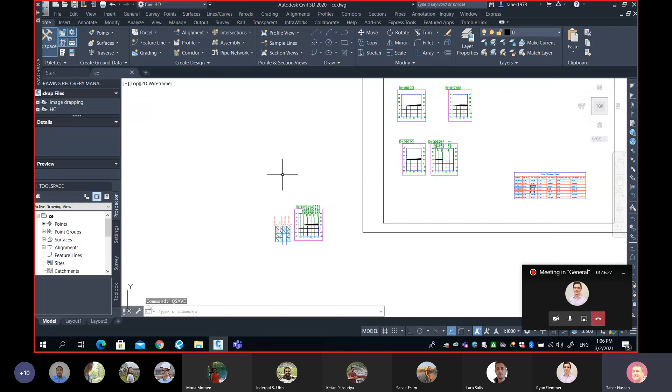Okay, so I still have 50 minutes in my class or so, 45 minutes, and I have something to teach you today. It's Civil 3D. So please go to your D2L, because I want you to download a file from D2L.

So go to your D2L like I'm doing right now. Log in, go to your surveying course, then go to content, and then under module number 3 we have a new module which is very short. It will start now and finish in 40 minutes. Very short module, and it's basically a Civil 3D training.

It's called Curve Computation and Layout. I want all of you guys to download those two files: the tutorial itself, which is a PDF file that contains all the discussion we will have in the next 40 minutes, plus a file called HC, which is a drawing file. Please download both, and also open the HC file in your AutoCAD or Civil 3D.

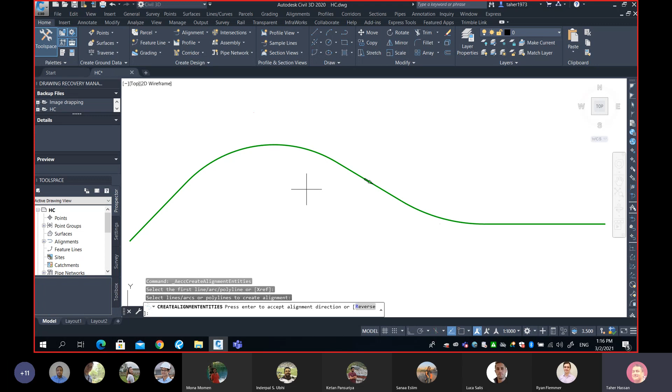If you like it, great, hit enter. If you want to reverse it by starting your alignment on the east side and ending at the west, then you can just type in R for reverse and hit enter. You know what, I'm happy, I'm going to hit OK. Then you can see we end up with this window.

We've done it before, it is called here my alignment. I can, for example, call this one Sarcee Trail. Typically we call alignment with the name of the road or our design, Crowchild Extension, Sarcee Trail, whatever. So here is the name of my alignment.

Next is alignment. Excuse me. Anybody's trying to say something? No, sorry, I forgot to mute myself.

No worries. So next we have type of alignments like center line alignment and other alignment. In this exercise it doesn't matter, I'm going to choose center line alignment. There are some other optional settings, like for example site. So we have no site here, so I'm going to leave it at none.

The style, which controls the color of the alignment and if it's continuous or dashed, I will leave as proposed. It doesn't matter, there are some few existing styles, but again for this exercise I will choose any one. It doesn't matter. I want to show you some labels, so you can see here I'm adding some labels. You can add all of them, or you can even add major and minor. It doesn't really affect my exercise.

And finally here the software allows you to add some curves if you want. My curves are there already, so I'm going to deactivate this option. I will simply erase my existing entity, which means if I hit OK, this green line will go away, will be deleted. So a name, everything here is optional, and then erase and hit OK.

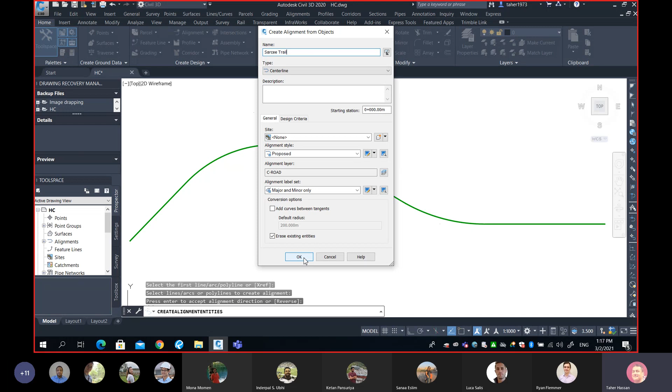What happened here is that the software right now has turned my green polyline into an alignment. So this is an alignment. And you can see the alignment comes with lots of labels. Those are called stationing. And it's kind of messy, messy because it's too much. The frequency of the stationing is so high.

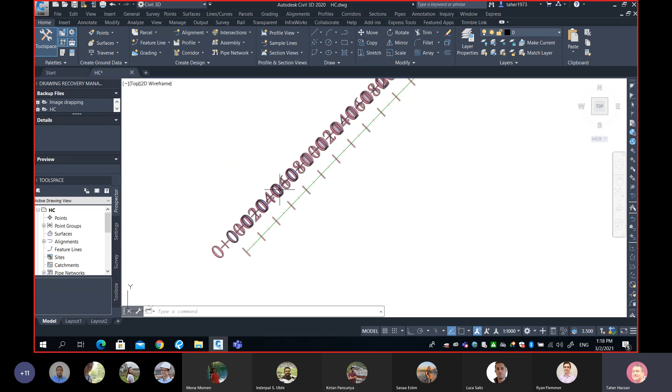I'm going to do something not really for the exercise. I can finish my exercise right now, but I want to make it clear for you. So I will simply change the frequency of my stationing. I'll show you how. And again, that's optional. I will click here on the labels themselves, then I'll right click, then I will go to edit alignment labels.

I'm trying to reduce the frequency. There is so much text on my plan view. So if you click on the labels and then right click and go to edit alignment labels, then I think almost all of you guys will figure out how to change the frequency of my stationing. Any help? Which number should I change?

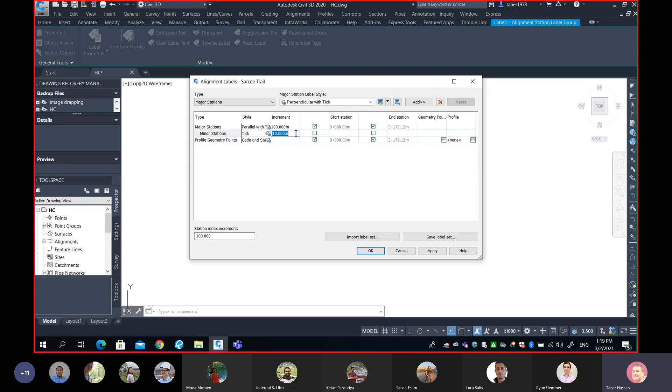The increment. Increment. So I will go here. I will edit this number. I will make it 100. It means add a major station at 100. And this one, I will make it 50. Then we'll hit OK. And see what happens when I hit OK. Now things become very clear.

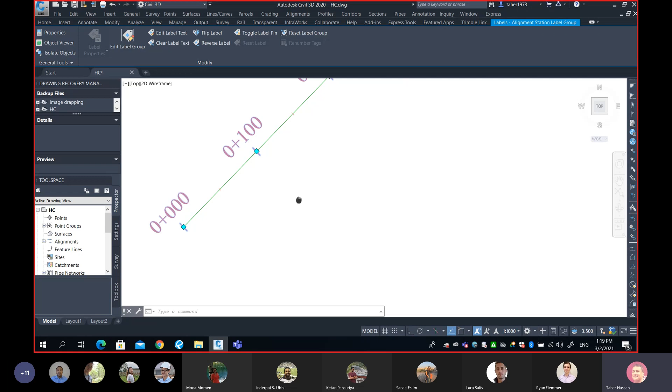I have a major station, which is a tick plus a station every 100 meters. And every 50 meters, I have a small tick, which is a minor station. Those are like major and minor contour lines. Those are major station and minor station. Now I'm ready to start building and creating some layout data.

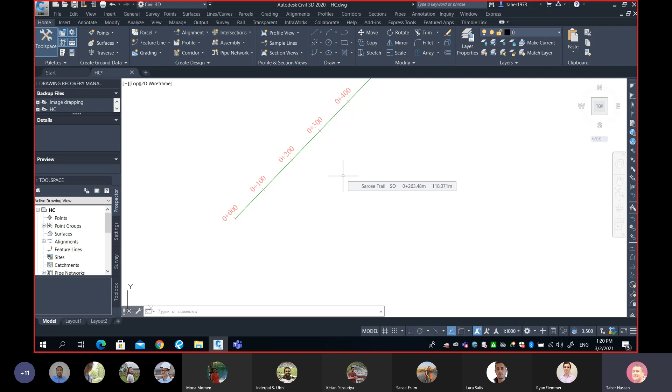Now, one of the methods that we typically use, which is very easy, is if we're able to create a Civil 3D point on the center line of my road, then I can export these points to my surveyor. My surveyor can take the file and simply upload it to the data collector and start laying out these points. Okay, so that's option number one, but that's not the best option. I will show you one more option later on. Let's create some points on the center line.

So what we do is you go to the menu points, and you guys remember we've used this window or this menu here a couple of times. One time when we imported points and one time when we added tables. Today you will have more on the same window or menu. So we go here to create points dash alignments.

And you can see we have so many ways of creating a point in Civil 3D. One of them is with respect to an alignment. So create points dash alignments. Even under dash alignment, there are probably more than 6 options. I will cover maybe one or two of them. Station offset, this one here, you need to enter the station of the point and the offset of the point, and it will create one point at a time.

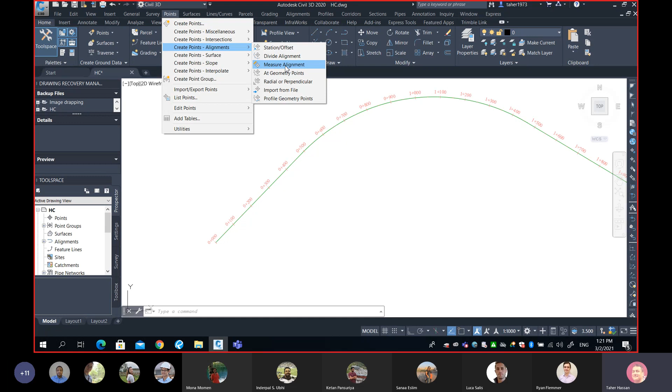It's not really handy, because if I want to create points every 25 meters for a 10-kilometer road, you know what happens? You're going to spend a couple of days to do that. Okay, so the other option here, which is faster, is an option called measure alignment. This measure alignment will simply do the magic, will simply place a point for you at every constant interval. Let's click on measure alignment.

So you can see here I'm ready to add my points. The software is asking you to select the alignment. So all you have to do is zoom in, click on your alignment, and the software picks the alignment and asks you a few questions. Number one is, what do you want for the starting station? Do you want to start from the start, from 0? If you agree, then hit enter. If you want to start from a different station, for example 1 kilometer, then you type in 1000. I will start from the beginning, so I will accept it as 0.

The second question is, do you want to go all the way to the end of the alignment, which is 3179.12? Yes, I want to go all the way to the end. I want to create points for the entire alignment. Hit enter. Next is specify the offset, which is how far left or right of the alignment. If you want to create points on the center line, leave this number as 0, so all your points will come to the center line.

If you want to create points off the center line, not on the center line, then type a number. This number can be positive or can be negative. If you place a positive number, the points will go into the right side of the alignment. And if you add a negative number in the offset, then the points will go left of the alignment.

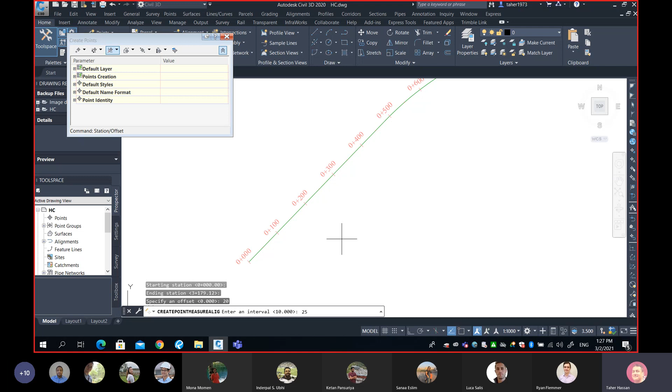Remember, ultimately, I'd need to place a point every millimeter to make my road perfect. But the thing is, you have to be practical, because adding a point every millimeter, the surveyor will take forever and it will cost you a fortune. So we go here with 25 meters and see what happens. Do you see what happens when I hit 25 meters? Something new has happened.

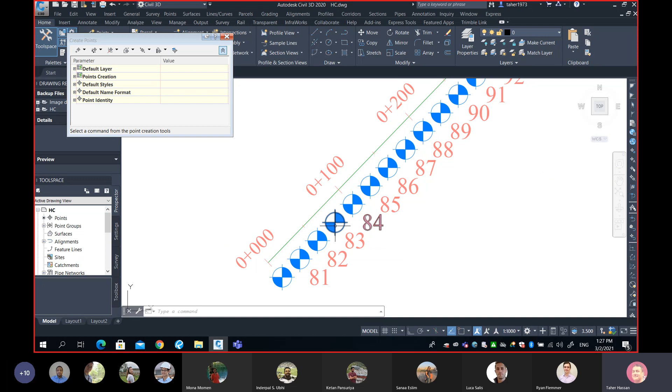You can see here, we have these points. If I zoom in, all these points starting from point 81 every 25 meter. And you can see they are not on the center line. They are offset by how much? By 20 meter. And the distance in between is 25 meter. So from point 81 all the way to the end of the alignment, we have a point here, which is 208. So the last number is 208. Remember this, 81 to 208.

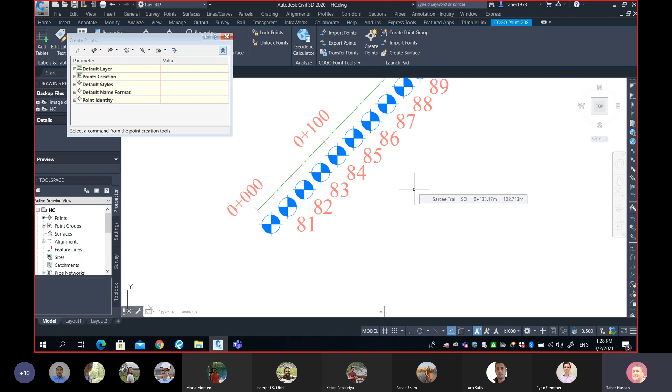Now, let me ask you a question. What should I do right now? I have created my points. I have Civil 3D points on my alignment. Should I save my file and send my CAD file to my surveyor? What do you think? Should I save my file as AutoCAD and send it to them and say, okay, you guys do it? Do you think this is a good format to send them a CAD file, or I need to do something to send it to them? Any thoughts? What should I do?

Go ahead. I think maybe we need to add something like elevation. You know what? Typically for layout of roads, we just go first by XY. So we place a point XY on site to tell us where the road is going. Then we control the elevation in a different step. So we keep adding layers until we go to the right elevation. So in layout, we typically do only 2D, and then the elevation will be monitored during the construction. So we need only XY.

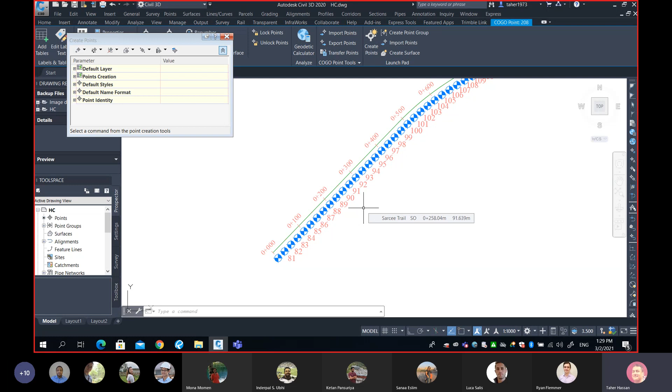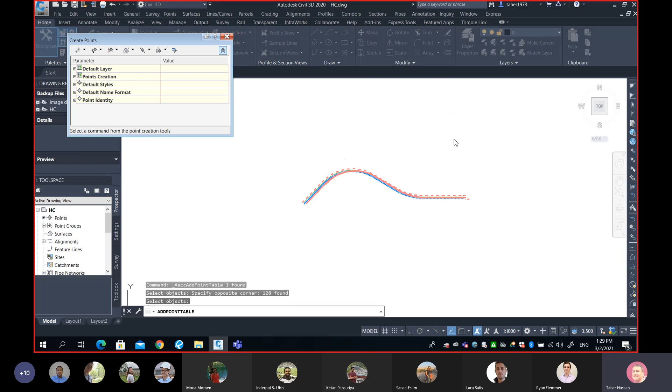But I'm asking you about the format. Is the drawing file a good format for my surveyor, or should I do something to give them a good format? Northing, easting points. Thank you so much. Okay, so some of my students in the last class said, Taher, why don't you print a table? For example, go to table and then add table and then say, okay, here is my points. Select all these points and then create a table for them. So for example, here is my table.

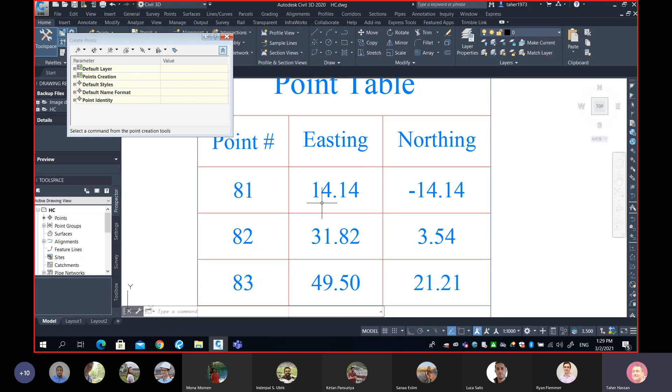And then your surveyor will go here and is trying to lay out point 81. So the surveyor will have to manually input the coordinates easting and northing of point 81. Do you think this is a good idea, to give them a drawing table? Or should I be smart and give them a better format? We should create the point file that we insert. Exactly, sir. So it's kind of opposite of what we've done before.

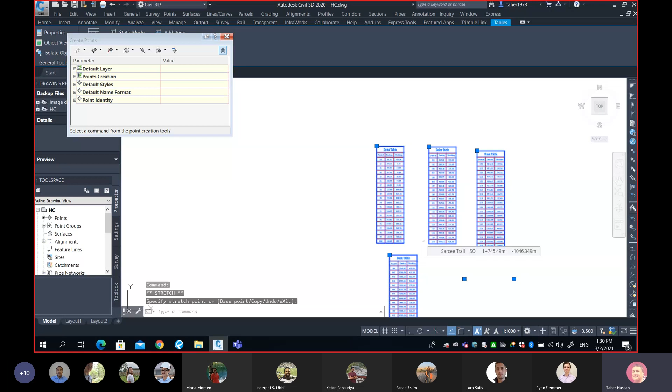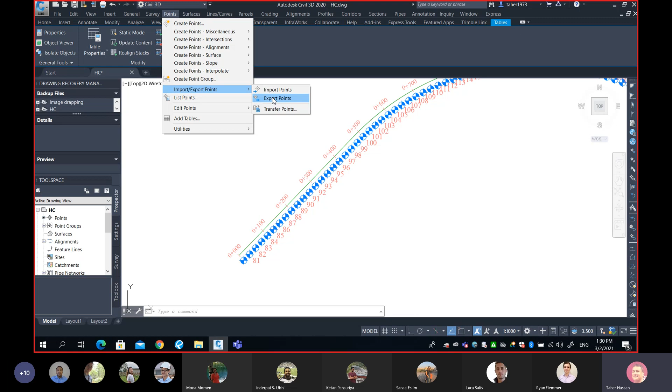Remember, my surveyor gave me a text file that contains our data in a text format. We will do here the same thing. We will try to write for my surveyor a text file that contains the easting and the northing of these points. So it's kind of opposite. Look at this. If you go point, you go import/export. If I have surveying data and want to bring it in, I go import. If I have points in my drawing and I want to write a text file that contains coordinates, I go export. So it's the opposite, import and export. So I will try to do that.

I'll go export. And look at the export point here. So first, you need to find the format. If you drop this menu, you will find the same formats that we did for the import. So we can write our file as PENZD or PENZ. There are so many formats. I'm going to leave this one as PENZD. Next, you want to say, what is the file name? Remember, you are creating a new file that contains these coordinates. So you click here and start writing your file. Watch me. I'm going to say Sarcee Trail.

If we don't have elevations, why do we pick that format style? You will see that it will simply add a default value. So the surveyor will look at the default value and will know that's off and that's not the right elevation. And again, it's up to you. If you want to export it as PEN without Z, without description, you can also do that by simply clicking on the right format from the drop-down menu. So I'm trying here to call my file a good name, and take my advice.

When you work, you must have an organized way of naming your file. Don't just go file 1, file 2. This is really a bad idea. So I'm going to say here Sarcee Trail. I'm going to say here 20 meter right, 20R, and then I'm going to say at 25 meter, and that's my interval. And I will say open.

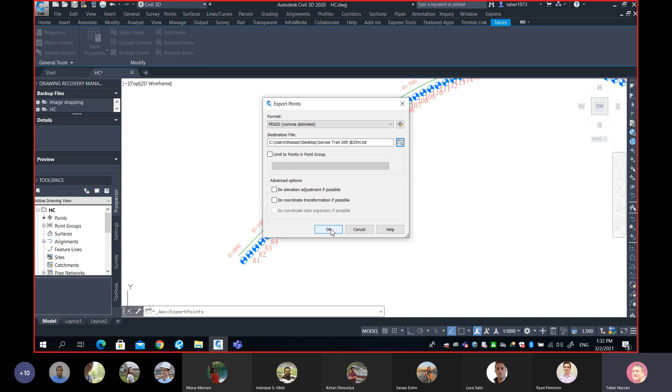And you can write your file in different formats like CSV, XYZ, AUF, NEZ, and all of them, to be honest, are text formats. So it doesn't really matter the extension. All of them are text files. Then I will hit OK, open, and finally hit OK. Then go to my desktop, and I will open my file and see what I have. Do you see that I have a default elevation?

Look at this number, -99999. Right away, all surveyors know that. Once you see -99999, you know that this is a wrong elevation, an outlier elevation. However, we use the easting and the northing. And again, if you don't like it, you can export only point number, easting, and northing.

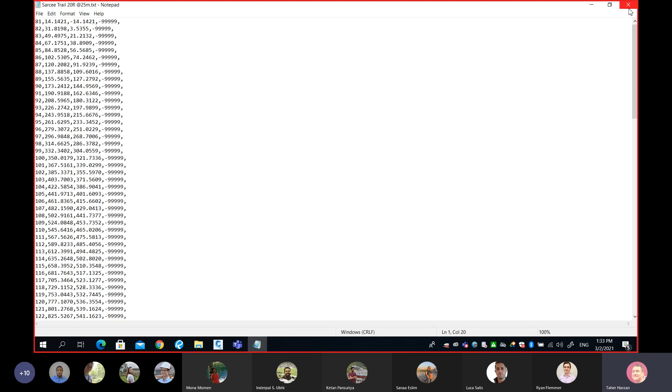Now, here is one thing you have to be careful about. I will show you something that's kind of annoying. Watch this. I'm going to show you my tool space. I'll just have to move things around, so please be patient. Now let me ask you, how many point groups do you see in my drawing? Can you count, please? 2. Can you give me the names?

ST and road. I'm asking you, those point groups, ST and road, are they empty or do they have points? They're empty, and we already discussed this. I said before, if you see a black dot here, it means these point groups have some points. So I have several 3D points, but those point groups are empty.

So where are these points then? Which point group do they belong to? Any help? All points. Exactly. By default, when I create new points, they go to underscore all points. And you can see all of the points are here. If I expand here, you can see all the points.

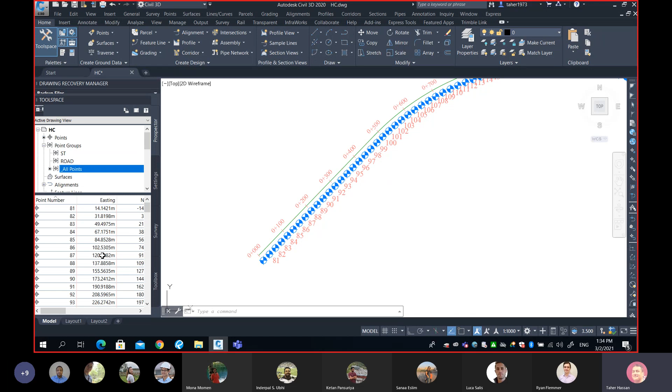Now, here is a problem. What if I have another road here, and I am doing the same thing, creating points along this line? Where will these points go? Into all points again. Is that a good idea? When we create points, by default they go to underscore all points. So now my all points will have a mix and match.

We'll have points on Sarcee Trail, and we'll have points on Crowchild. So all the points in my drawing go to the same container. Is that a good idea or bad idea? And remember, look at this. When I exported my points, I simply exported everything. So there is an option here, please look at it right now.

Right now, if I hit OK, it will simply export all the points in this drawing, which in general is a mix and match between points on Sarcee Trail and Crowchild and other roads in my drawing. However, I have the ability to limit the export to points in a point group. If I drop this menu, I have my 2 point groups.

However, if I click on road, give a name here and hit OK, what do you think is going to happen? Any thoughts? Remember, road is empty. Right now, the point group road is empty. That's why if you hit OK right now, your file will be empty. Do you guys agree? Yes.

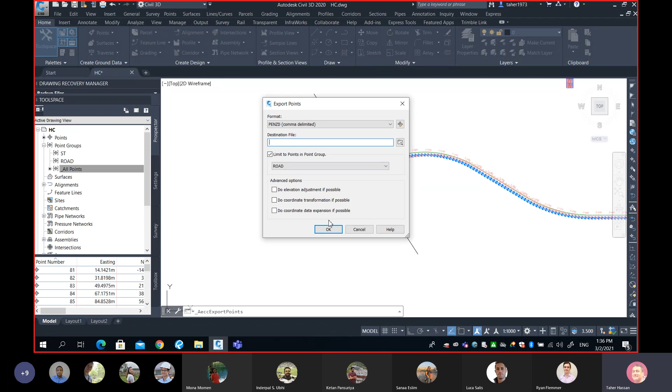So I'm going to show you a little trick. What it does, it simply takes a copy of these points and places them into road, which means inside road we would have only these points. Watch me, please. Right now, they are in underscore all points. I'm going to show you how to move these points and place them in road. Very simple. Watch this.

You click on road, right click on road, and then say properties. Did you guys see this window before? Can I get confirmation?

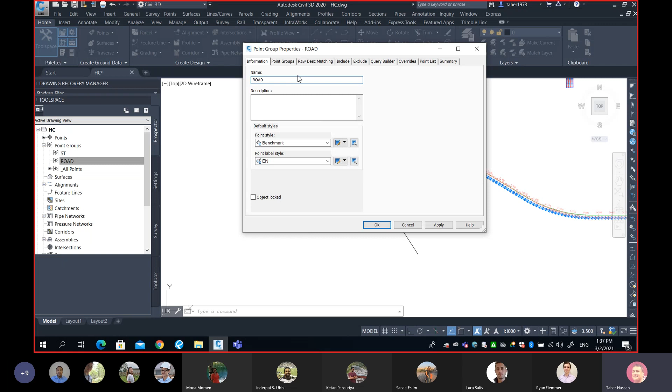Yes. Yeah, this is where we played early on. We changed the name, we changed point style, point label style. However, today we have another job to do. I will go to include. Watch this. I go to Include tab. When you go to Include tab, this area here allows you to include points to my point group using several options. For example, you can include points based on the description, or based on names, or based on elevation,

or based on point number. Anybody remembers what was the range of my points? Anybody who has good memory? What's the first number? 81 to 208. So 81, that's the start. And then I put here dash and I go to 208. Thank you so much. You guys are amazing. So my points, the first point was 81, the last point was 208. What does it mean right now? It means, hey, Civil 3D, include for me points with number from 81 to 208.

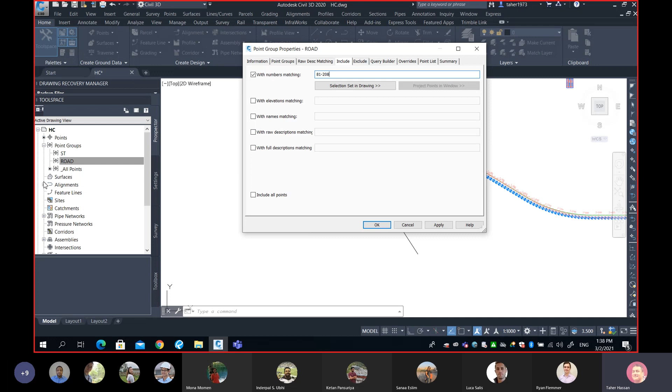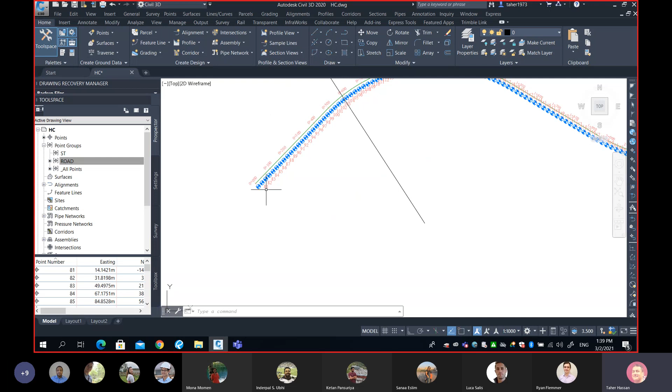Okay, I want everyone to look at my Toolspace as I hit OK. Everyone, please focus here, because something is going to happen. If I hit OK, do you see what happens? Anybody to confirm what happened after I include my points? It copied the points into Road. You can see here right now, Road is not empty anymore. Right now, Road has been populated by the points from 81 to 208.

Okay? Now, what I can do is I can go to Points, go to Import/Export, and then I can simply choose my file name, file format, and I can limit my export to the point group Road. In this case, your file will not be empty. The file will have all these points from 81 until 208.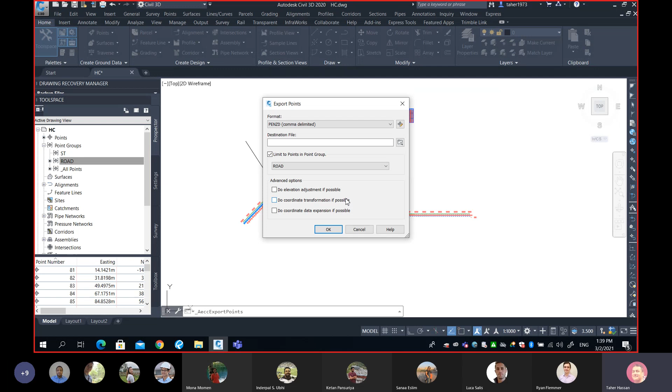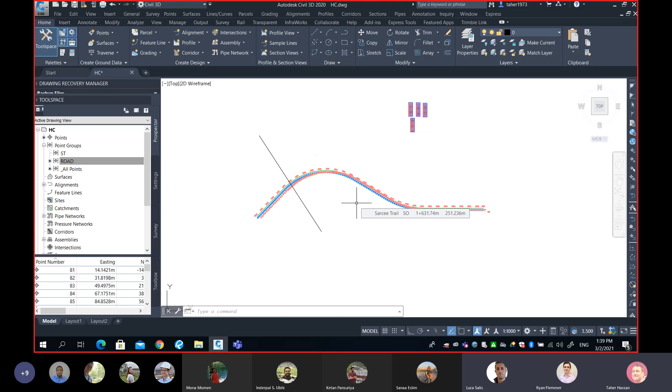Okay? And by the way, let's say I come here and I create points on this road. I will create a new point group, I will add these points to this point group, and when I export, I will limit my export to only this point group. Are you guys following? Yes. Okay, let's do one more exercise.

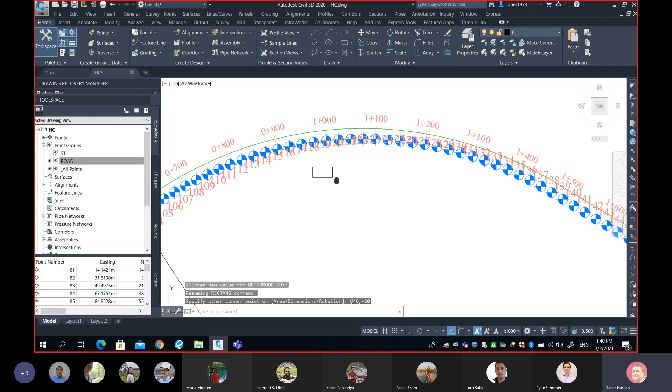Let's say another designer of the same project designed here a building next to my road, and this building was simply 40 meter by 20 meter. So this is my building. He gave me the design on this CAD file. And the building is supported on piles, and the piles, let's say, are at every 10 meter. Please be patient, I'm just doing some CAD work.

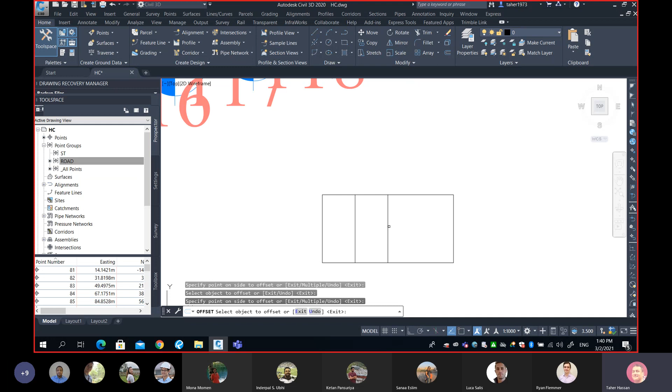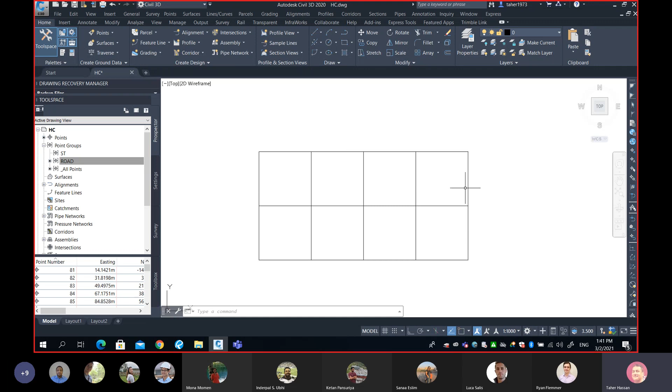I want to show you the location of the piles. My piles are simply here and there and there, and then finally there. So every intersection here gets a pile. And I want to lay out these piles. I want to get my rig and tell them, drive a pile here. So what I have to do is manually place points at these intersections. Then I will export these points.

Please watch me. This time I go from the Points menu, but my points right now are not with respect to an alignment or a surface. All I have to do is go to Create Points. You'll get this window here. If you drop this menu, you will get exactly the same options as we get from the menu. So we can do it manually, we can do by station offset, we can do by measure alignment. All these options are available here.

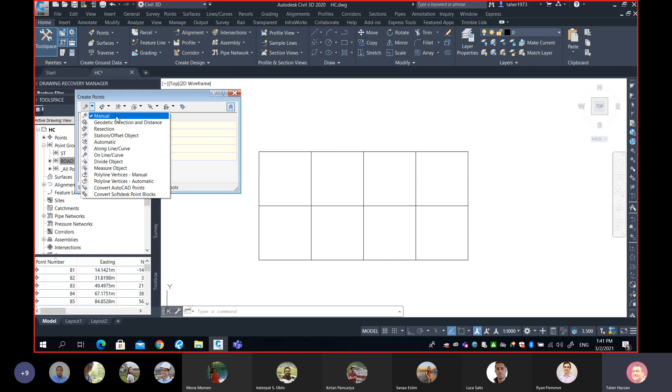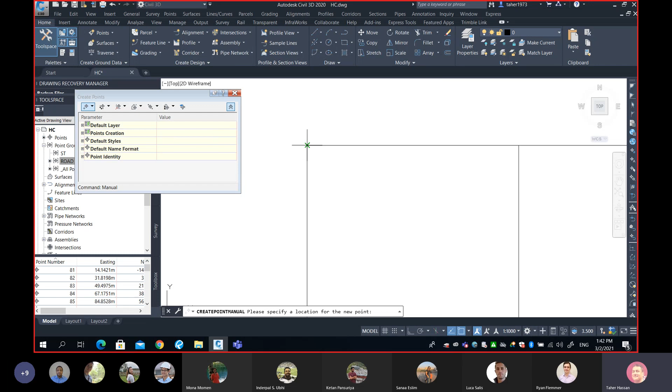So we go manual. Right now I'm ready to place my points. Before I do that, you should activate your OSNAP because I want to hit exactly the intersection. So I go here, make sure OSNAP is there, and hit OK. If I click here, my point will come to the intersection exactly. I will click here on this corner. So here is my first point, second, third. I'm creating right now the location of the piles. Okay.

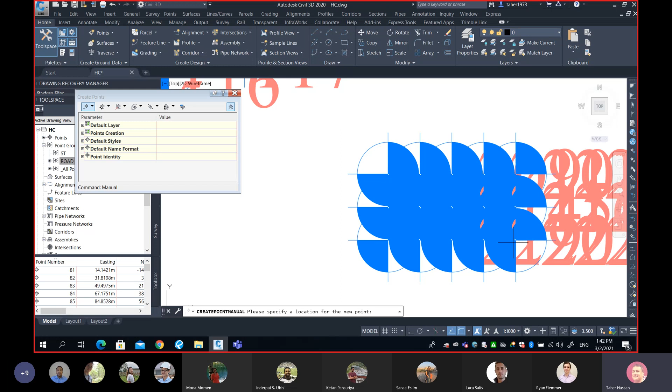And then number 6, 7, 8, 9, 10, 11, 12, 13, 14, 15. So again, this is messy because the font is big and the point is big, but I have created right now 15 points on the pile location.

Now I'm asking you right now, how can I get these points to my surveyor? Anybody give me some idea on how to export these points to my surveyor? If I export right now, is that a good idea or bad idea?

Only the people who follow the discussion will answer this question. If I export right now, you think this is a good idea or bad idea? Bad idea. Better to put it in a point group.

Exactly, it's a bad idea because when I export right now, the software will export all points, which is the piles plus all the points on the road. So this confuses my surveyor.

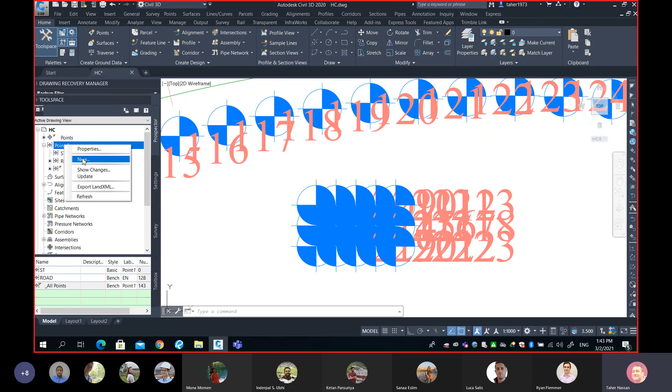To do that in a good way, you need to cancel. Then I come here and say, I want to create a new group. So you click your cursor on point groups, right click and say new - it means create for me a new point group. And here you call it, for example, building piles. So I'm trying to create a group for building piles.

Right away, once you create the point, you go to include and simply click on this option. Do you guys remember what was the number? Anybody remember the number of the point? I know some of you will say 209, because that's where we ended at 208 before. So my point here would be 209, and then you add 15 points.

By the way, you don't have to memorize those numbers, because here is another option: select set in drawing. So you can also select the points by selection. If you click here, this window will disappear and you can manually select all the points you like to include. Hit enter, please watch this.

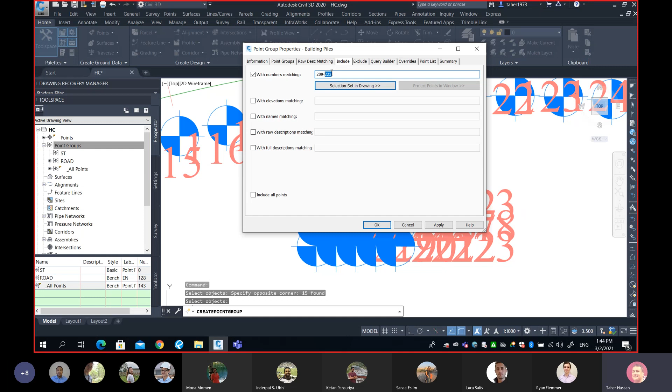So right now I get from 209 all the way to 223, which is 15 points. Let's go ahead and hit OK. You can see, look at my tool space - I have a new point group called building piles, and it has 15 points like those, because we have this dot.

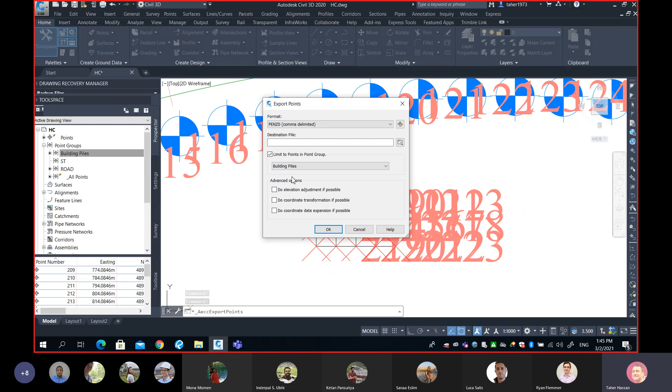Right now, I can go to points and export my points, and I can limit the export to my building piles. I give it a name here, for example, building piles, and then hit OK, and hit OK.

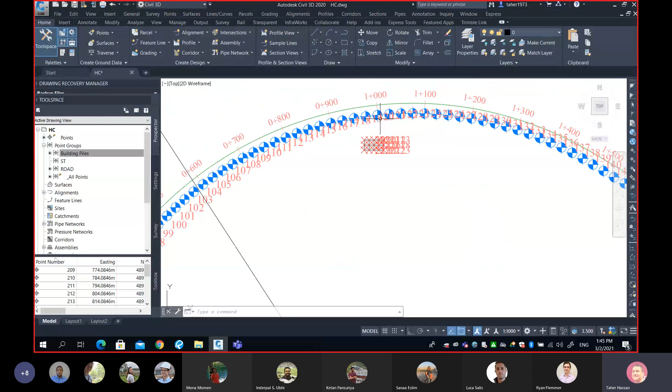Then let's look at the file on my desktop, building piles. You can see here I have the points from 209 to 223, not all the points. If you did that before, then you would get so many points because it's a mix and match between the building and also the road. Are you guys following?

Yes. Okay, so in the next 5 minutes, I will give you something that will not be on the exam, it will not be in an assignment. It is just something for you if you work for a company that does surveying.

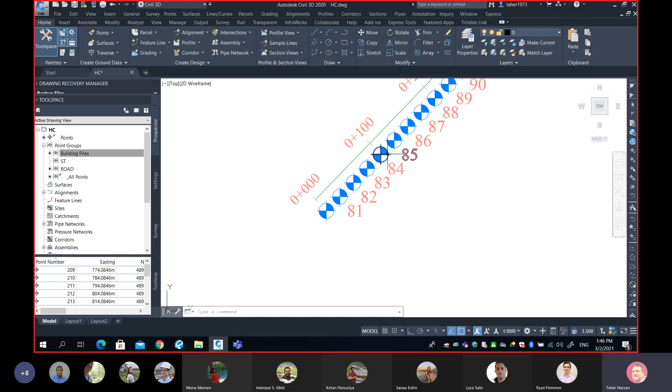Now, here we go. What we did so far is we created points on the road every 25 meters. Now, let me ask you, what if my client wanted to change their mind and they want a different frequency or different offset or maybe another point? What should I do? Obviously, I have to repeat all the steps, which is really not a good idea.

So there is another option. Instead of exporting discrete points on the alignment, why don't we export the entire alignment instead? And by the way, this is the best way, because when you export the alignment itself, it's up to the surveyor to choose an offset of 5 meters, an interval of 10 meters. It is up to them on site because you give them the alignment itself.

I'm going to show you right now how to do that. But hopefully you guys agree that exporting the alignment is better than exporting discrete points on the alignment. Do you guys agree or disagree?

Looks like you're tired. I know that I teach you a lot of material, but to be honest, I'd like you to learn more about Civil 3D, because every company will ask for Civil 3D skills. So if you graduate with good Civil 3D knowledge, you are ready for your job.

Now, do you think exporting the alignment is better, or exporting just discrete points on the alignment? The alignment. So let me show you right now, it's very simple and doesn't require any effort. You go to Alignments in the tool space. Remember, my alignment was a center line alignment. If you expand Center Line Alignments, you'll see Sarcee Trail. All you have to do to export your alignment is right click, and you'll see an option called Export LandXML. Let's do it. If I go Export LandXML and hit OK, it will ask me to give it a name, so I'll call it hc.xml and save.

Now hit open. Let's look at this XML file, which is here. This is my XML file. If I double click it, can any one of you guys read this? If you're able to read this file, you're immortal. This file is not designed for you to read — it's designed for the data collector, for the total station.

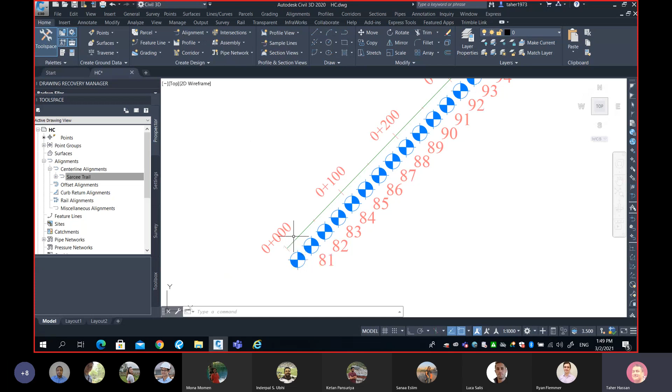It's written in a language only read by experts — only someone experienced in total station or GPS can read this file. But I can tell you the secret: although it looks very complicated, this is the geometry. For example, in this file you have the start point coordinates, the beginning of the curve, and the radius of the curve. So this file basically tells you all the geometry of your alignment, and it can be read by the data collector.

Because the software knows the geometry, it can simply lay out any points, whether offset or on the center line — it doesn't matter. This file is called an XML file, and it can be read by most data collectors. For example, if you have Leica, it can read XML files. And with this, I'm done. Any questions before we end class today?

So what was the purpose of what we originally did along the road, marking those points, and then giving those to surveyors — what's the point for them to mark? Amazing question. So what was the point? Because you're saying I kind of contradicted myself — I taught you something, then went back and said there's another, better method. So here's the point.

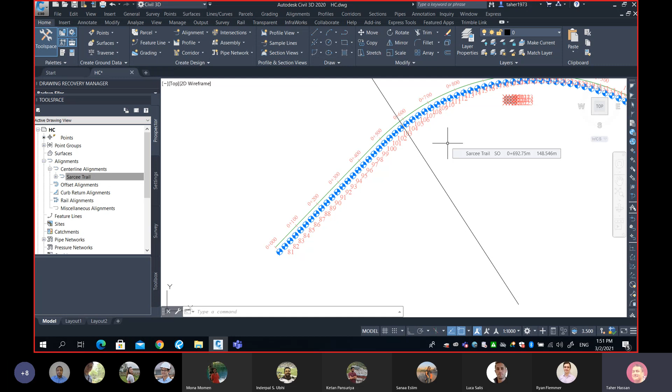When you hire somebody to do the survey, not all of them are the same. Some surveyors have basic skills — they know how to use the data collector. So the discrete points method is so simple any surveyor with less experience can do it. The other method, reading the alignment and laying out with respect to it, not everyone can do — you only understand what I'm saying if you have real surveying experience. So I'm showing you both. If your surveyor is comfortable laying out points from the alignment, send them the alignment, that's the best way. But if you have a beginner just starting to learn, the discrete points method is easier on the data collector.

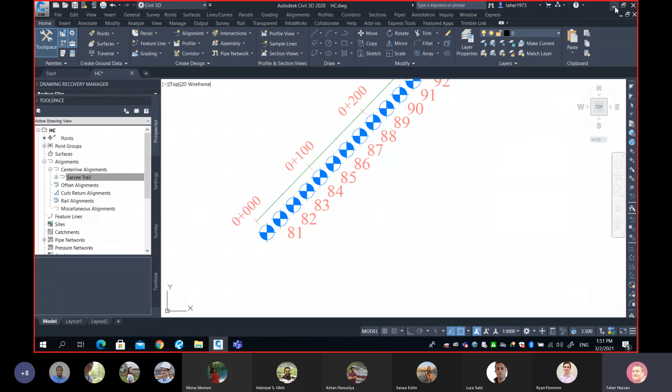You'll just simply say, lay out for me point number 81, that's it — once you click on point number 81, you start laying out the points. Working with the alignment is a bit more complicated, not on your side, but on the total station or GPS side. Does it make sense? Maybe, it depends on how much experience you have. If you have experience in surveying, you exactly know what I'm saying. I had a student in another class who worked as a surveyor, and he told me right away that working with alignment is not straightforward — that's not on your side, it's on the data collector side.